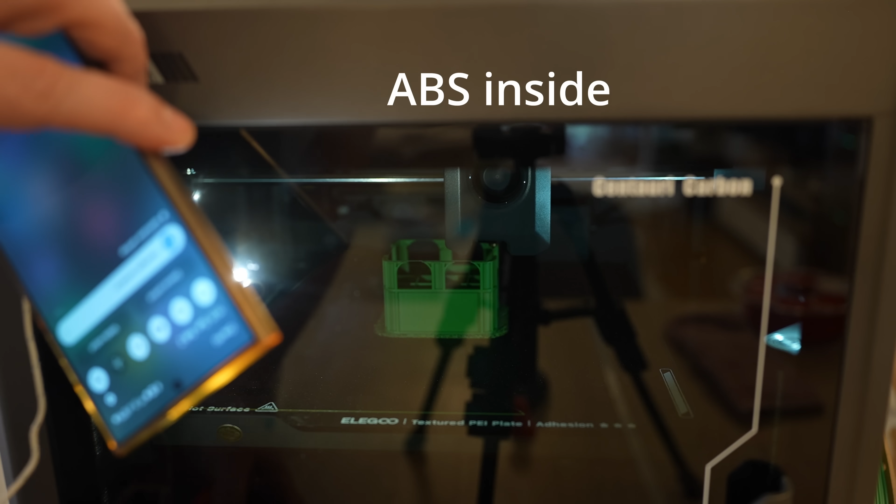Another request from Elegoo is to print this on the Centauri Carbon, which is ready for these technical filaments. Usually I print these test objects on the X1 Carbon - in that case, results are more comparable to each other - but since I got this filament from them, and basically this was their only request, I'll use the Centauri Carbon.

Don't forget that nylons are very sensitive to moisture and require drying, but let's see what's in the box.

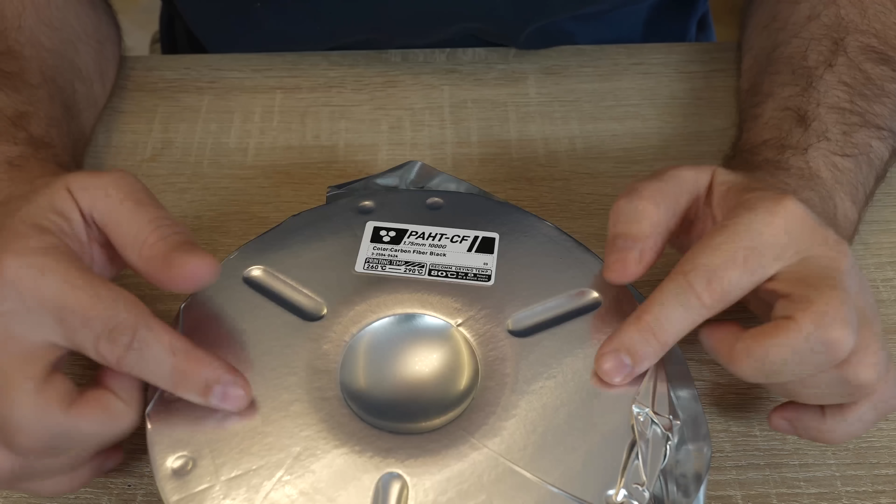This is very good vacuum packaging that protects the filament better from moisture, and this bag is resealable on this side. We have the same print settings which I already mentioned on the sticker.

Cardboard spool with reinforced edges.

Now let's see how brittle the filament is. Not too brittle, but let's measure it. Start angle 20 degrees... around 110. Definitely not brittle, and it's not even broken completely.

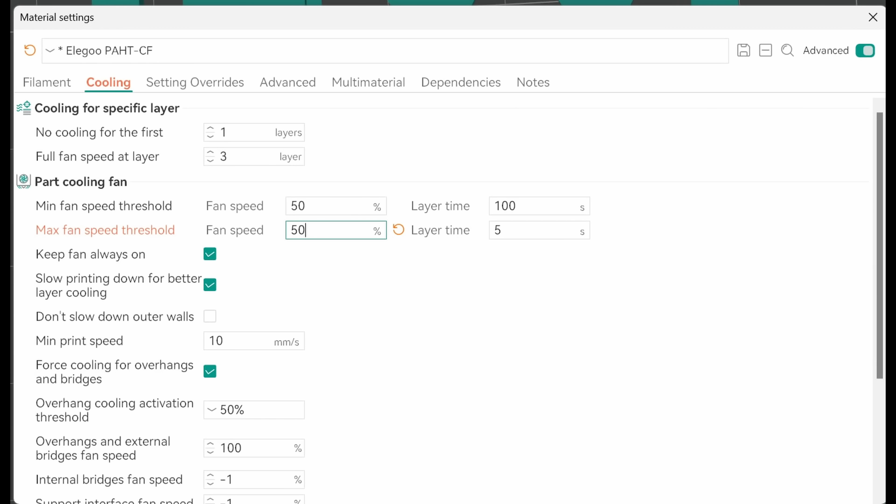Settings in the slicer: nozzle at 280 degrees Celsius, 85 on the bed, 12 is the maximal flow rate, and 50% will be the maximal part cooling.

Objects are printed on the Centauri Carbon behind closed doors. The printing was smooth without any problems, even if it's hard to see through this glass.

Objects are printed and ready for mechanical testing, but I will wait at least 3 weeks so the test objects can absorb some moisture from the air and get closer to a stable state.

Elegoo doesn't mention anything about annealing on their website, and I know that in most cases users will not do this annealing process. Additionally, I don't even know what the base material is. In my experience, annealing helps against creeping and improves temperature resistance, but for this video I will test these objects without annealing.

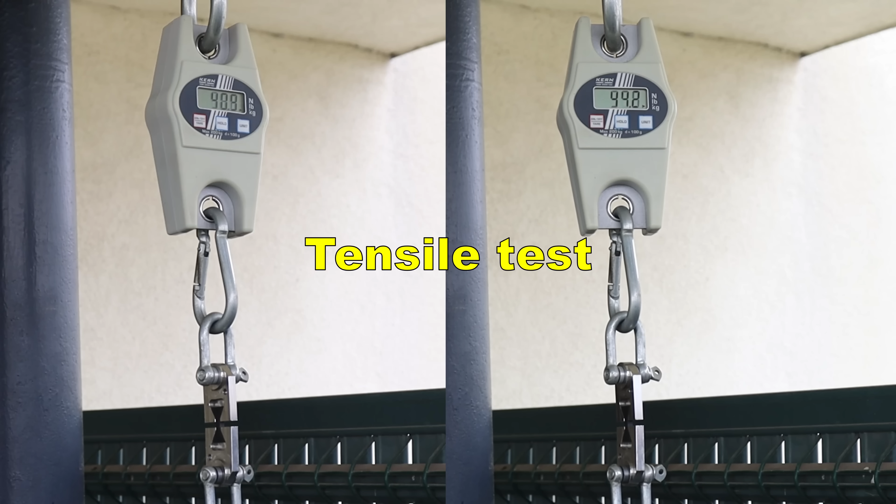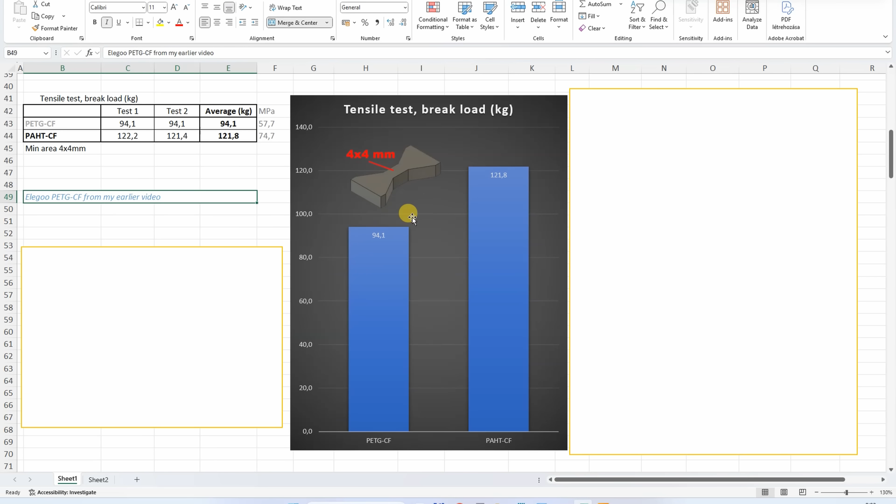Tensile test with horizontally printed test objects. Very strong results, and for better reference I will include the data for Elegoo PETG-CF from my earlier video. We can see that PAHT-CF is significantly stronger than PETG, but overall this is a very strong material in this test.

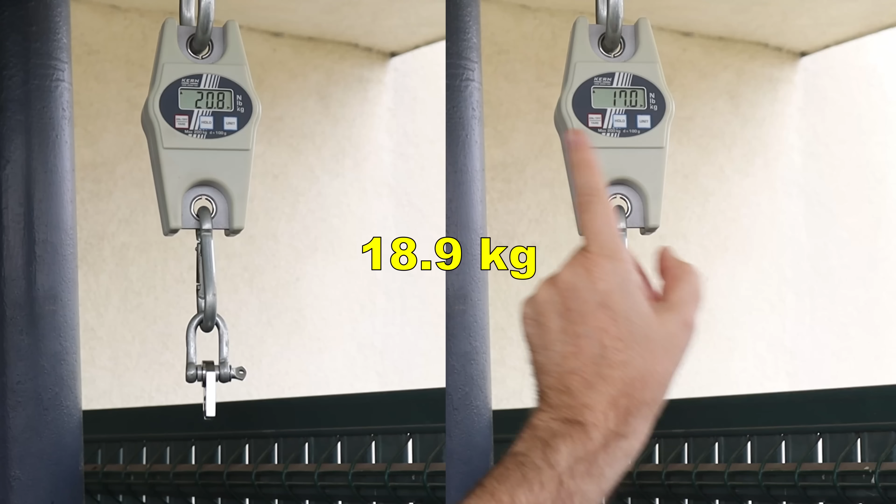Layer adhesion with vertically printed objects - unfortunately this is weak. This table is my rating for layer adhesion with these test objects, and we can see PAHT-CF is quite weak with these settings.

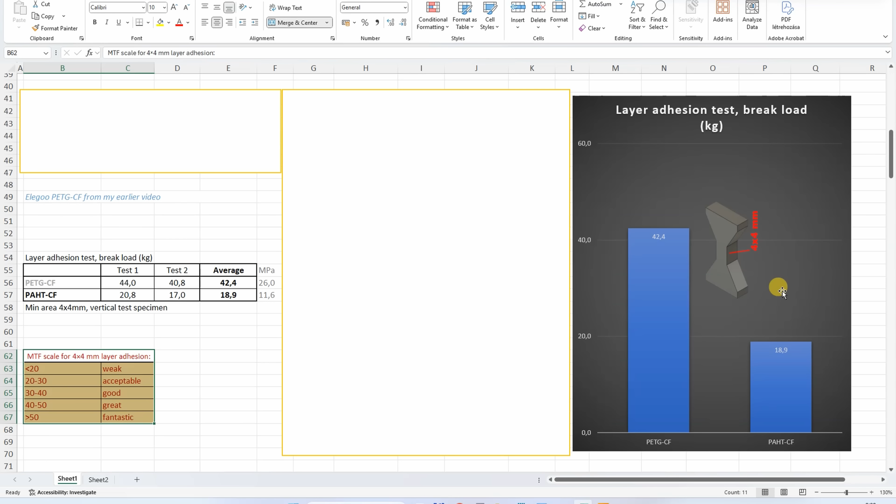Now, I wanted to see if I could improve this with a heated chamber, for example, but I got the request to use only the Centauri Carbon. I prefer to buy the filament myself, then I don't have these kinds of limitations.

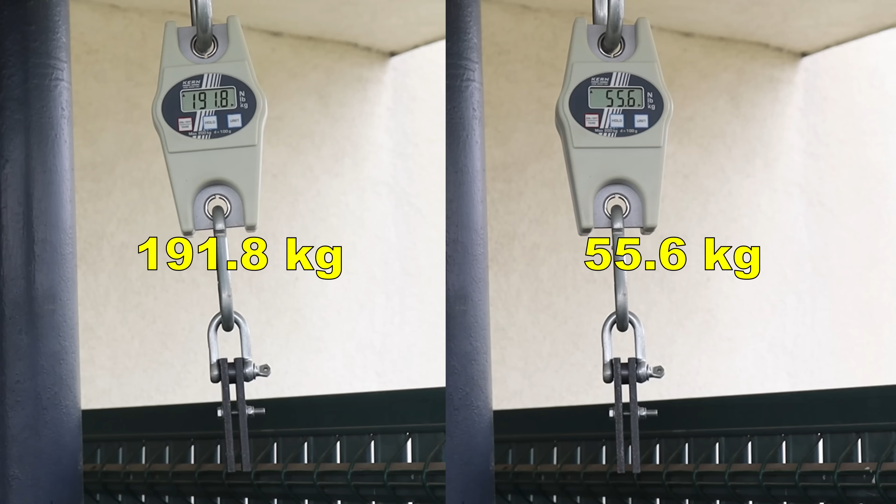Shear test, side by side horizontal and vertically printed objects. Printed in horizontal position, very strong - I was lucky that I could break it with this scale because the maximum on it is 200 kilograms. So overall this property of the material is great.

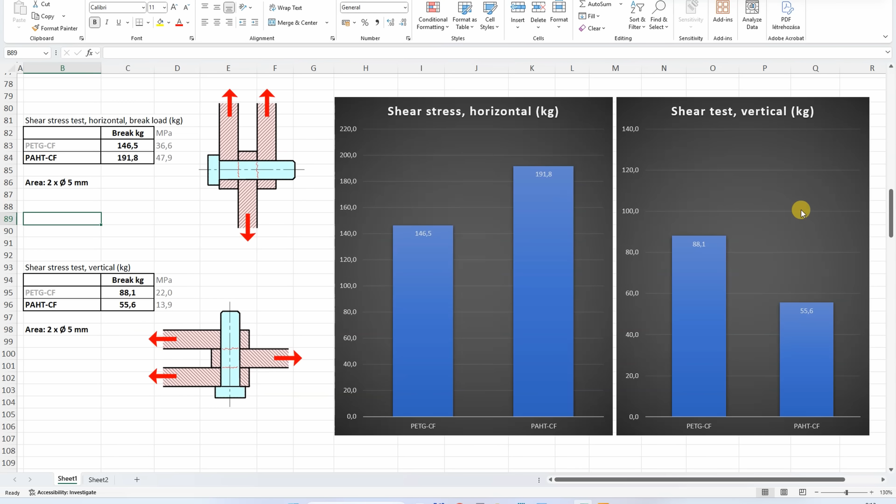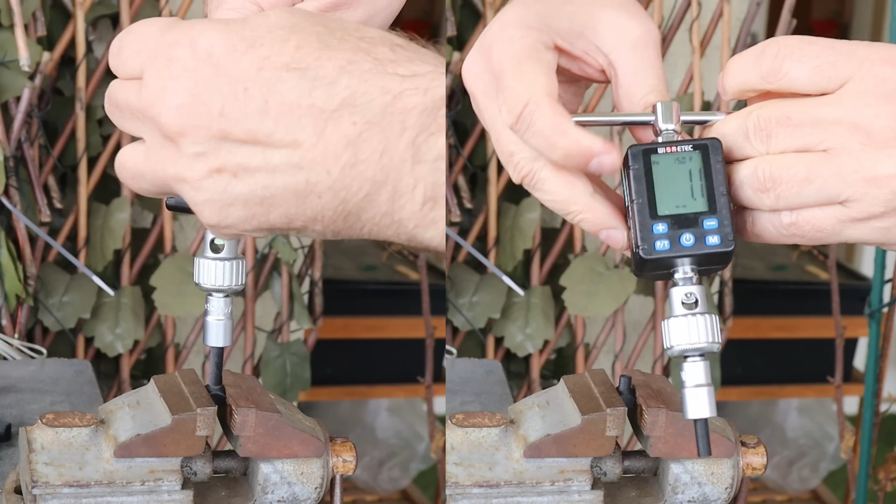Now printed in vertical position, the effect of layer adhesion is important, and unfortunately here it is significantly weaker compared to PETG. Torsion test, side by side horizontal and vertical test objects, loaded with 90-degree rotation - very similar, 1.1 is the maximal load.

Printed in horizontal position, loaded to 90-degree rotation at 1.1 Newton meters, but in this case I could continue rotating and reached the 2.1 Newton meter load with almost one full rotation. Probably there are applications where this may be important.

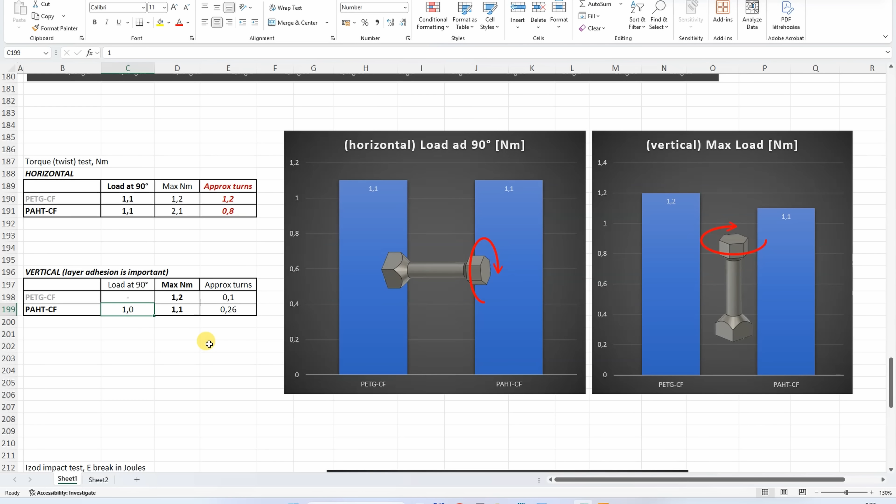Now printed vertically, 1.1 Newton meters, which is fine, but what's interesting is that I could even measure the load at 90-degree rotation, which is quite rare. Usually it breaks more suddenly, so even against this weaker layer adhesion, this is a very promising material.

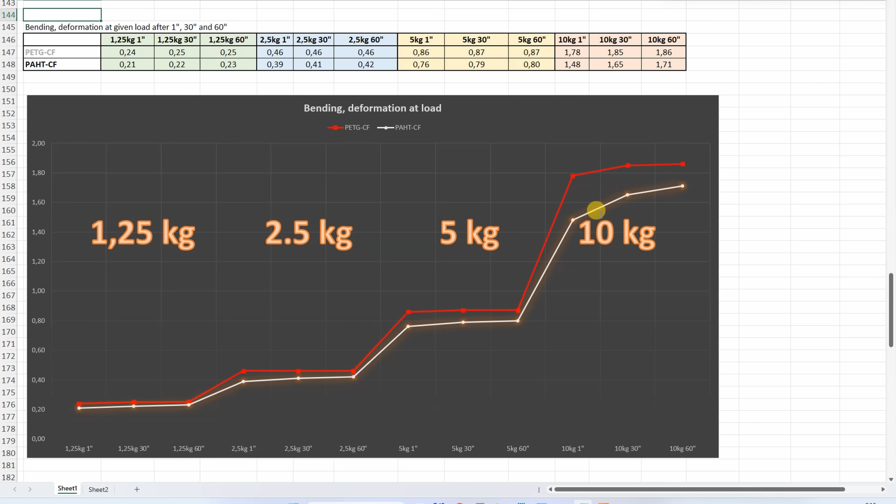Not big, but there is some permanent deformation after this test. First of all, we can see less deformation of the PAHT-CF compared to the PETG-CF. But what I don't like is this: under 5 kilograms it's not so noticeable, but at 10 kilograms we can clearly see that this is far from being horizontal. This means that this nylon doesn't really like higher constant loads.

Impact test with the half kilogram hammer. Zero position. One more time in slow motion. These are the edge positions of the hammer, 132. I will calculate the breaking energy, but this is a tough material.

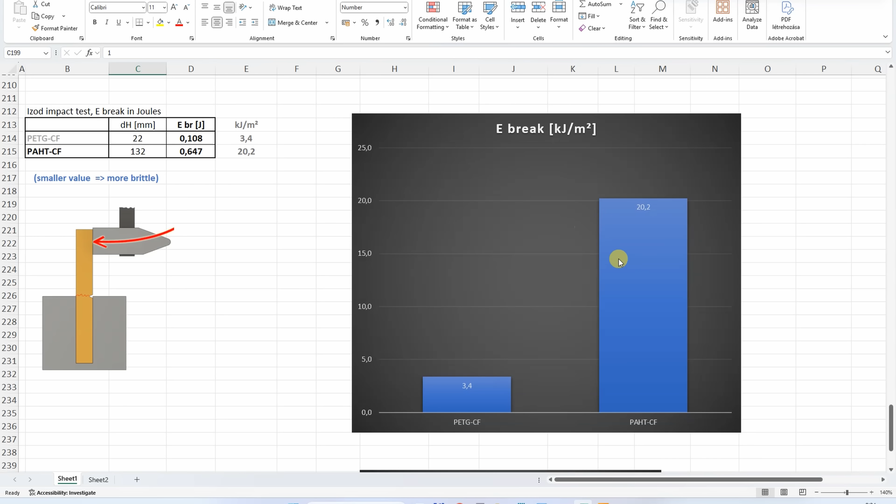And this is a test where this material shines compared to the PETG or any other material. Even if it is reinforced with carbon fibers, this is quite a tough material.

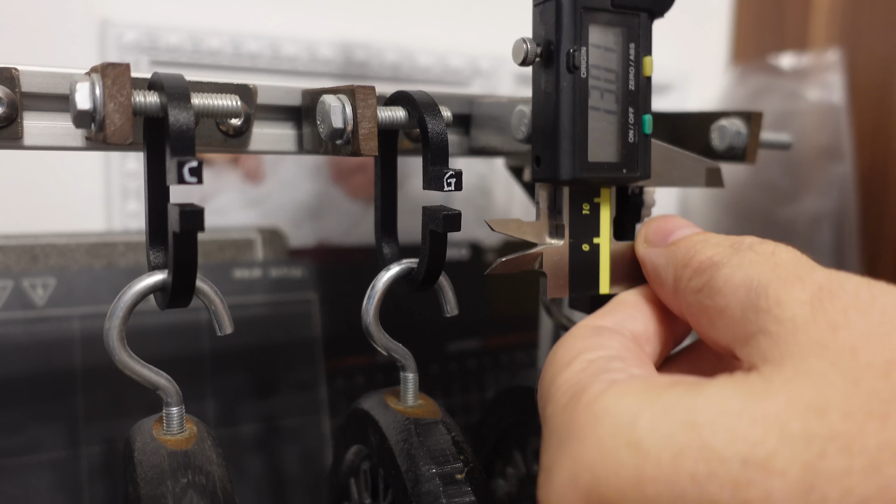Creep test, the deformation under constant load. This is PETG carbon fiber, glass fiber, and this is the nylon. Very small deformation. 13.01, very small deformation. They will be measured every day, but in the video let's jump in time.

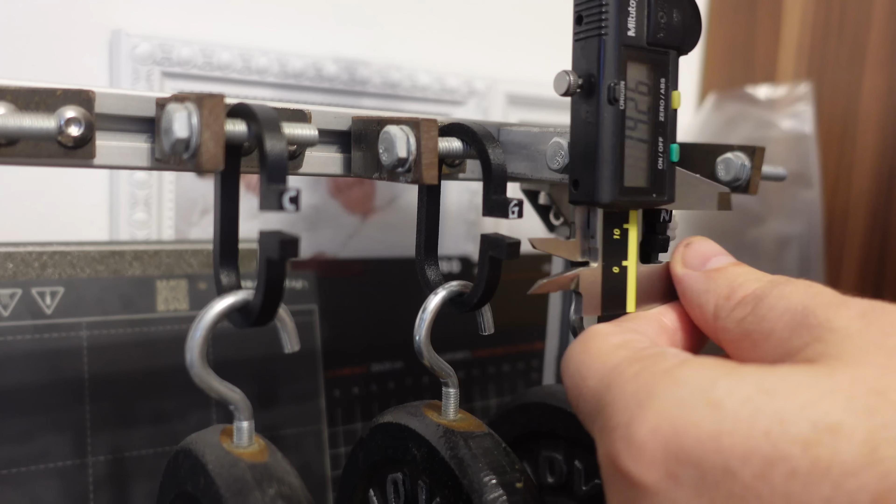14.26, let's remove the load. Looks like it creeps and I don't really like this property, but after removing the load the permanent deformation is basically very minimal. On this graph we can see the distance between two reference surfaces.

We can see that the PAHT-CF has less deformation compared to the PETG-CF, but the creeping is the difference between two days. On a second graph we can see that the PAHT-CF has more creeping compared to the PETG-CF. This is typical for nylon, so don't be surprised.

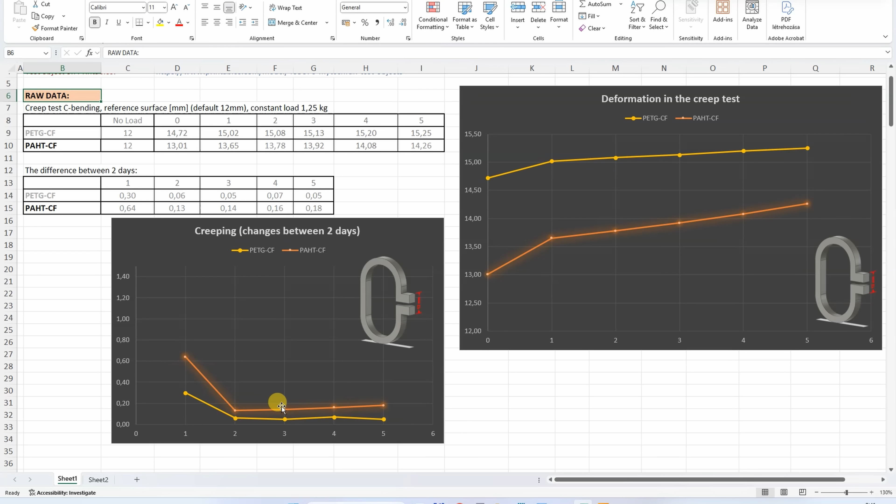Annealing can help here a little bit, but overall I wouldn't place higher constant loads on the nylons.

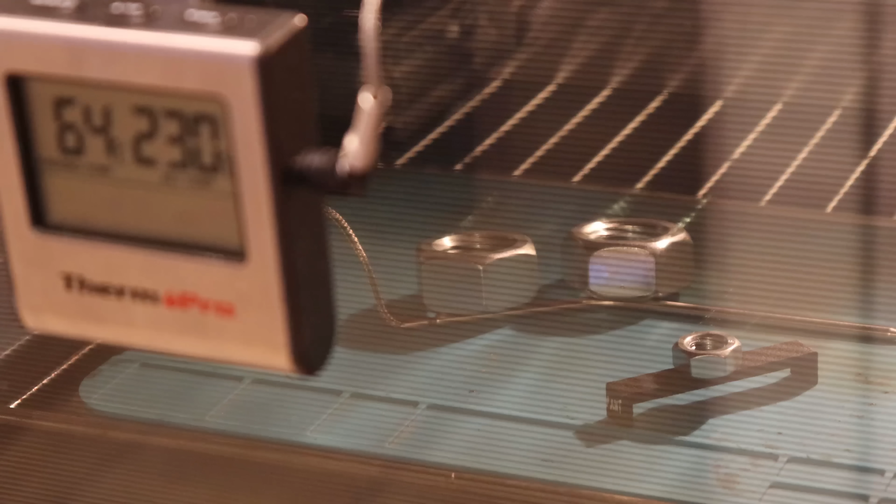Temperature test in the oven. Even the recorded time-lapse is sped up here. The first deformation I noticed was at 212 degrees Celsius, but then it deforms very suddenly, so be careful, don't go closer to this temperature.

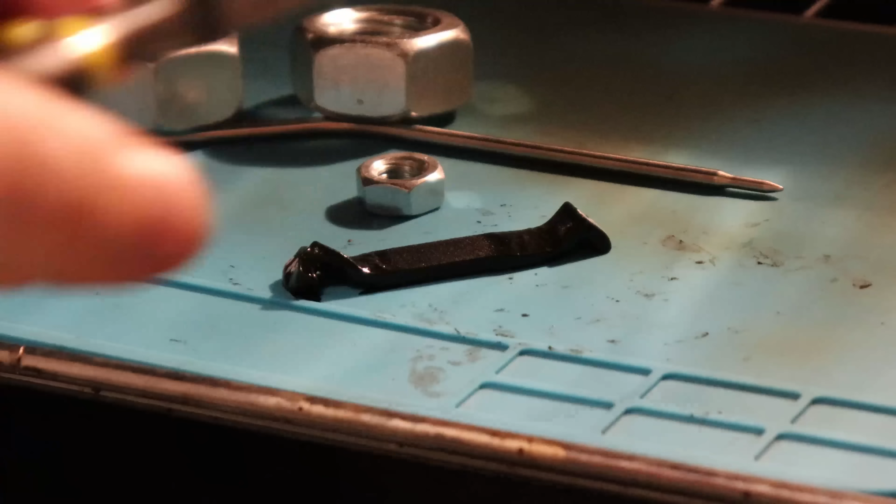Soon I stopped the experiment, but it was really melted and stuck to this silicone mat. I could easily scrape it off, and don't worry, I finished this outside.

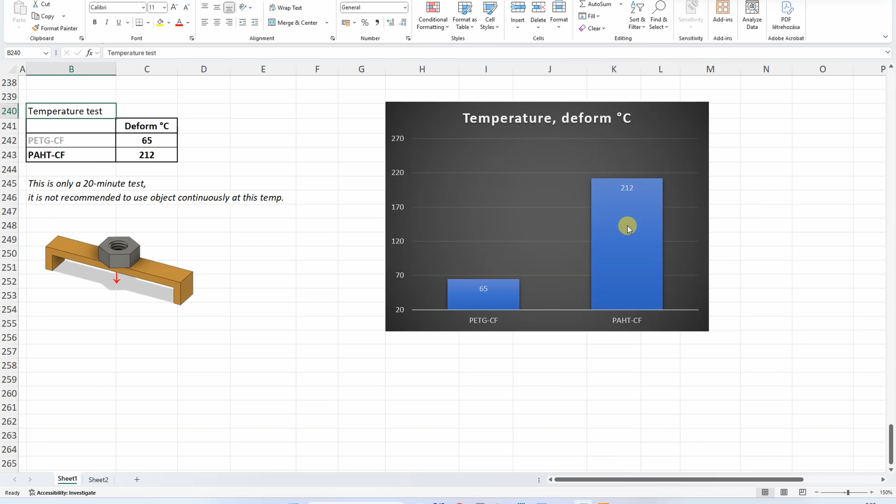Another very important property of this material is that it is very temperature resistant, even if I didn't anneal it. Now be careful, don't go closer to these temperatures, because it deforms very suddenly.

All results one more time, without any additional comments.

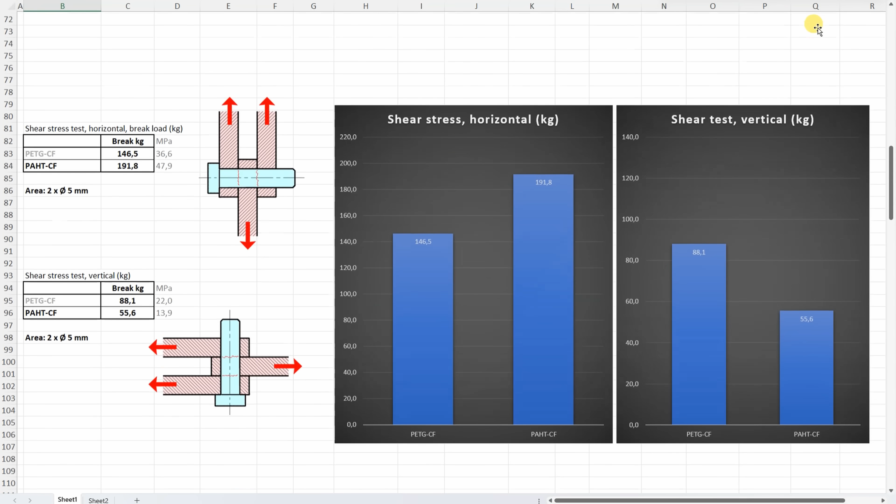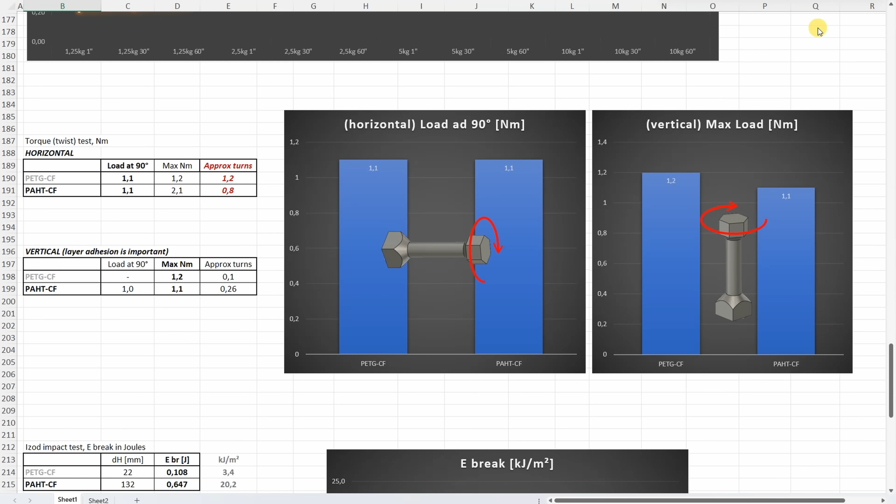Results of the bending test after 30 seconds. Bending test, deformation after 1, 30, and 60 seconds. Torsion test, impact test, and a temperature test.

Really budget-friendly nylon, very strong in most cases. Biggest advantages: tensile strength, impact resistance, temperature resistance. Disadvantages: a little bit weaker layer adhesion. Maybe we could improve this, but I didn't test it with an accurately heated chamber. It also slowly creeps, so I definitely don't recommend using any kind of nylon under higher constant loads. Annealing may help a little bit, but even then this is a very typical property of nylons.